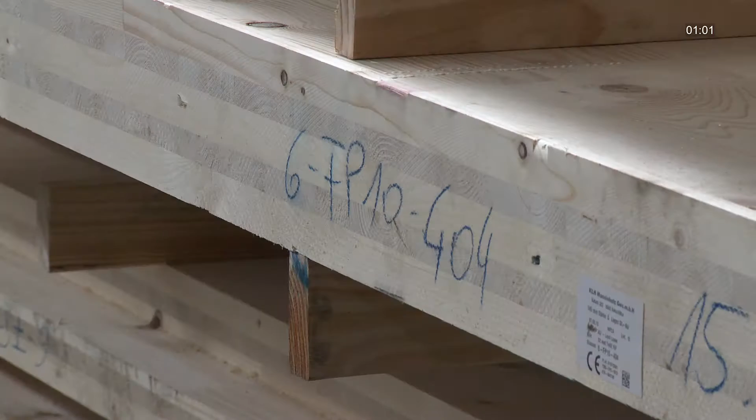Around the world, national codes and standards are being changed to recognise timber construction approaches to mid-rise buildings. Australia is no exception, and the 2016 National Construction Code has now been changed to allow for the use of timber construction, both lightweight and massive, under the deemed to satisfy provisions up to an effective height of 25 metres for Class 2, 3 and 5 buildings. This opens up huge new opportunities for the use of wood products and cost-effective timber construction systems in apartments, multi-dwelling buildings such as hotels, and offices up to around 8 stories in height.

This education and training resource has been developed to assist you as building professionals to clearly understand these new National Construction Code changes and to show you how to practically and successfully implement them into your future projects.

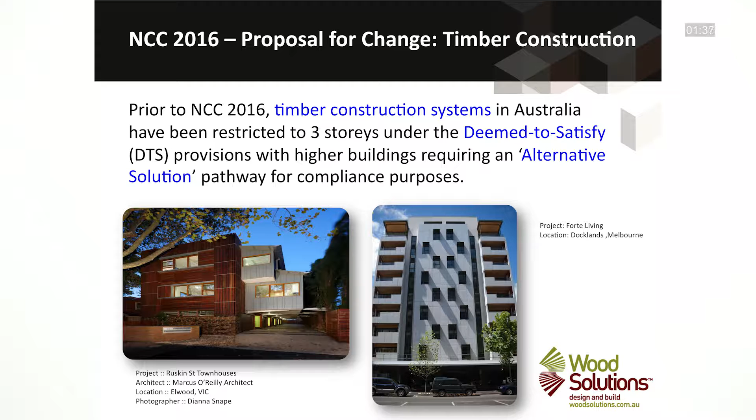Prior to the release of the 2016 National Construction Code, timber construction systems in Australia have been restricted to 3 stories under the Deemed to Satisfy or DTS provisions. Higher buildings, such as the Forte Living Building shown here on the right, have required an alternative solution pathway for code compliance purposes. This pathway can be a somewhat expensive process and therefore has limited the take-up of mid-rise timber buildings in Australia to date.

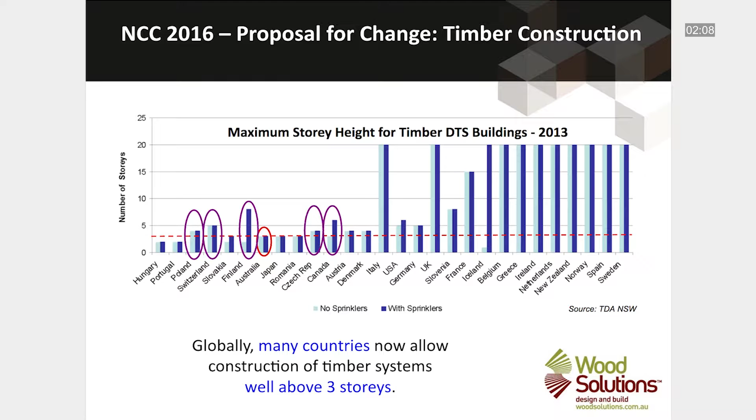Globally, however, many countries allow construction of timber systems well above 3 stories under their respective building code deemed to satisfy provisions. This provides a far cheaper solution for demonstrating building compliance. Many, as highlighted here, have amended their building codes in recent years, and as a result have seen quite dramatic take-ups in mid-rise timber construction.

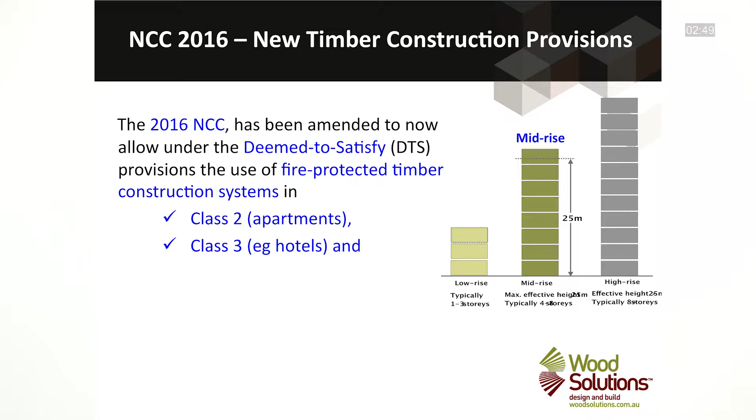To assist in bringing Australia in line with international practices, Forest and Wood Products Australia has undertaken a detailed fire testing program, and in February 2015 submitted a proposal for change to the Australian Building Codes Board, seeking a modification to the National Construction Code, Building Code of Australia, Volume 1, deemed to satisfy provisions, to allow the use of fire-protected timber construction systems. The 2016 National Construction Code has now been amended to allow, under the DTS provisions, the use of fire-protected timber construction systems in Class 2 apartments, Class 3 multi-dwelling buildings such as hotels, and in Class 5 office buildings up to 25 metres in effective height, or approximately 8 stories. From here on in, this will be referred to as mid-rise timber construction.

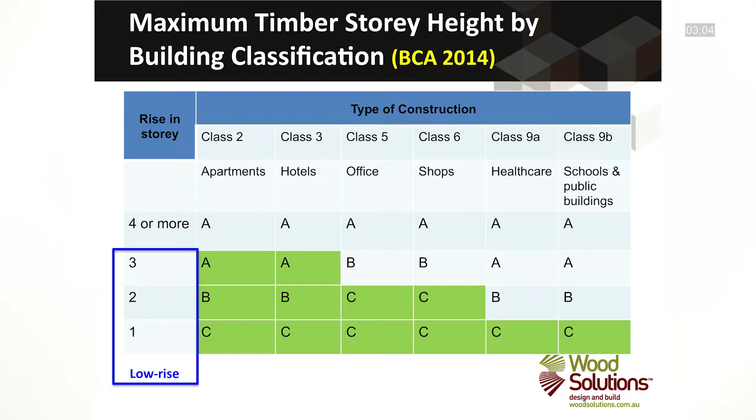For the past 2 decades, it has been possible here in Australia to construct timber buildings up to 3 stories, or what is known as low-rise construction under the DTS provisions. And a wide range of information is available in this regard, including a number of Wood Solutions technical design guides to assist with this design process.

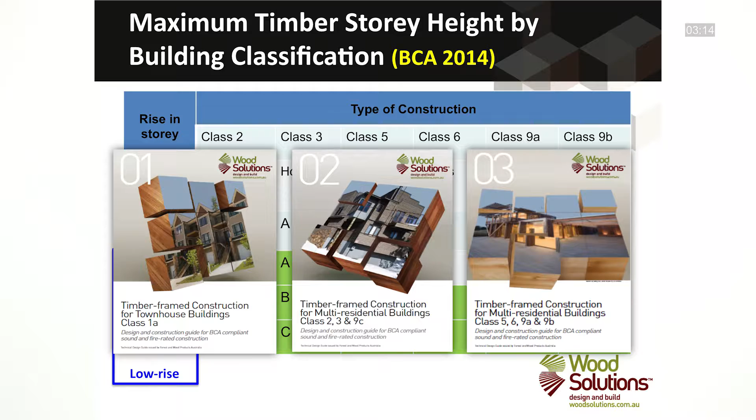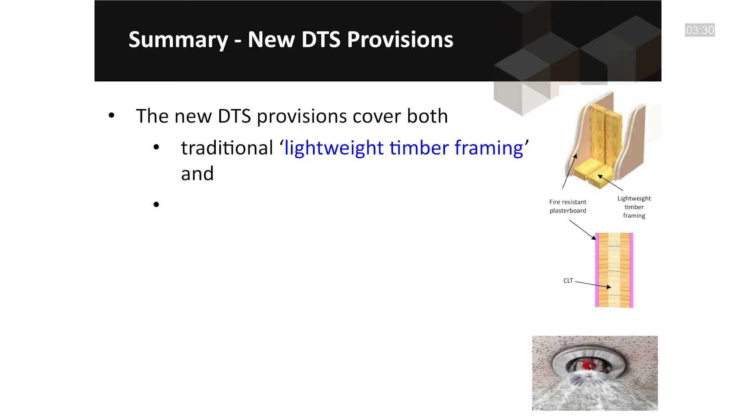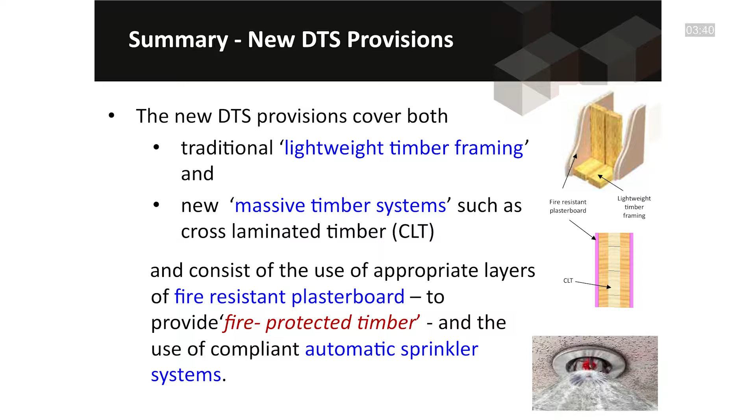This code change provides a major new opportunity for a wide range of timber products and systems in mid-rise apartments, hotels and office buildings. In summary, the new DTS provisions cover both traditional lightweight timber framing and new massive timber systems such as cross-laminated timber, known as CLT, and consist of the use of appropriate layers of fire-resistant plasterboard to provide a fire-protected timber and the use of compliant automatic sprinkler systems.

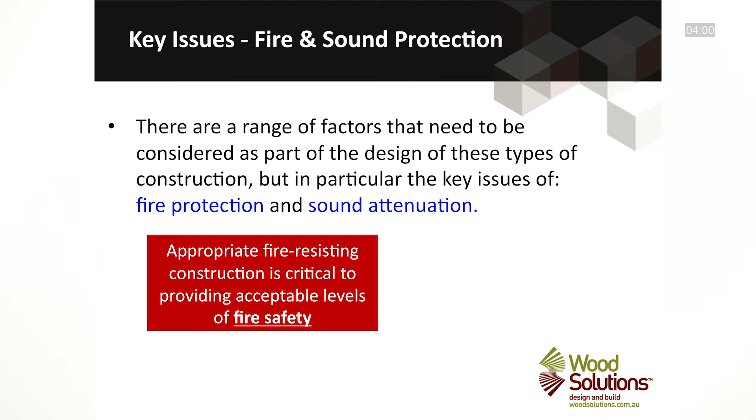There are a range of factors that need to be considered as part of the design of these types of construction, but in particular the key issues of fire protection and sound attenuation. Appropriate fire-resisting construction is critical to providing acceptable levels of fire safety, though one hopes that there will never be a fire event in the life of the building. While sound insulation is important because of its daily impact on the quality of life, occupants of apartments or hotel rooms want to be insulated from noises and activities in the adjoining occupancies.

This education and training resource and the accompanying technical design guide aim to assist in providing advice in this regard for a wide range of building professionals involved in mid-rise construction. This includes architects, designers, specifiers, engineers, regulatory and certifying authorities, developers, builders, and on-site trades installing the systems.

This educational resource covers a broad range of topics, including timber construction system options, the NCC 2016 changes and the accompanying regulatory considerations, details on the fire protection requirements and the acoustic performance requirements. It examines the key fire and acoustic design considerations and the critical construction and installation issues, and finally the considerations in regards to ongoing maintenance.

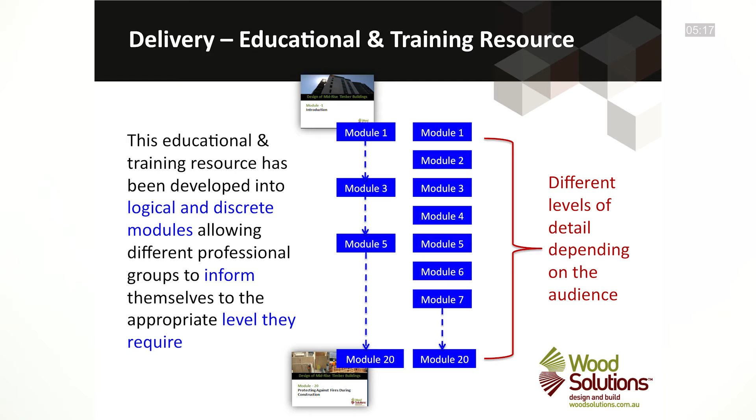Different levels of detail can be assessed on each of these topics depending on the audience or the viewer's needs. To assist, this education and training resource has been developed and is available in logical and discrete modules, allowing different professional groups to view and inform themselves to the appropriate level they require. Users can view all the modules or specific topics depending on their needs. The resource is available through the Wood Solutions online campus website.